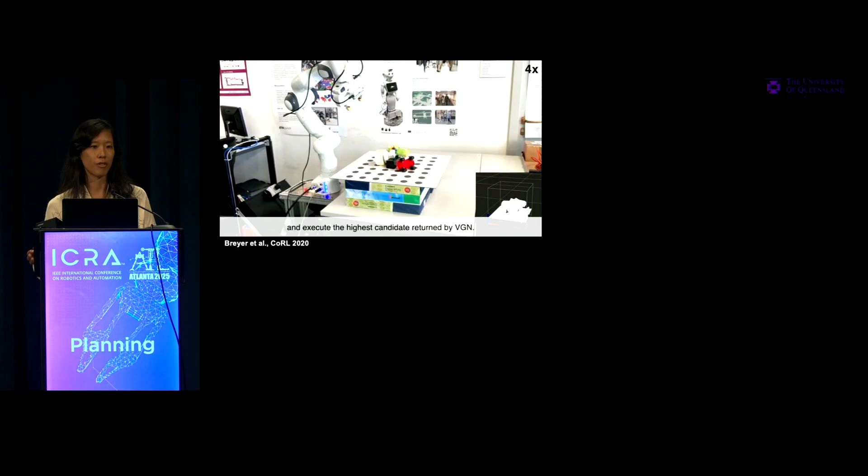So what kinds of physical interactions do our robots do well right now? I'd argue that they're pretty good at grasping at the moment. We really know very well how to get a geometric representation from 3D cameras, for example, which we can then use to plan grasp actions.

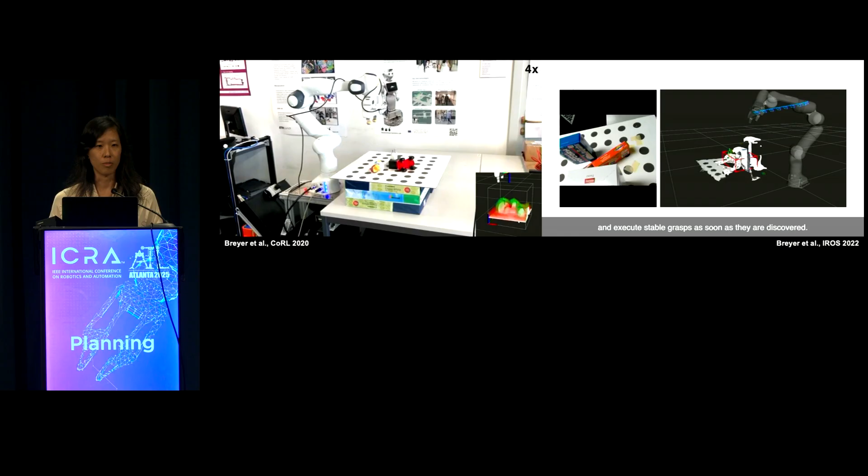We also know how to make the sensing part of this task more efficient through methods like active perception, where we only need to look at parts of the scene that matter to solving our task. So if we want to grasp a particular object, we don't need a perfect reconstruction of the full scene. We really only need to be looking at certain parts of the environment.

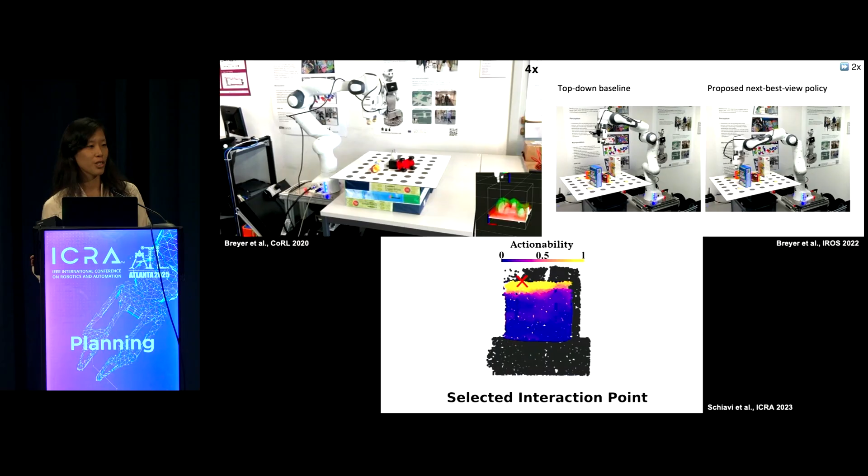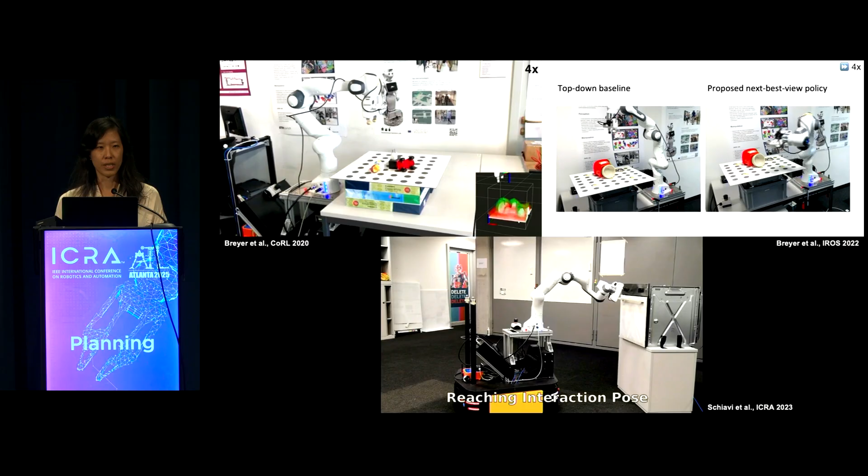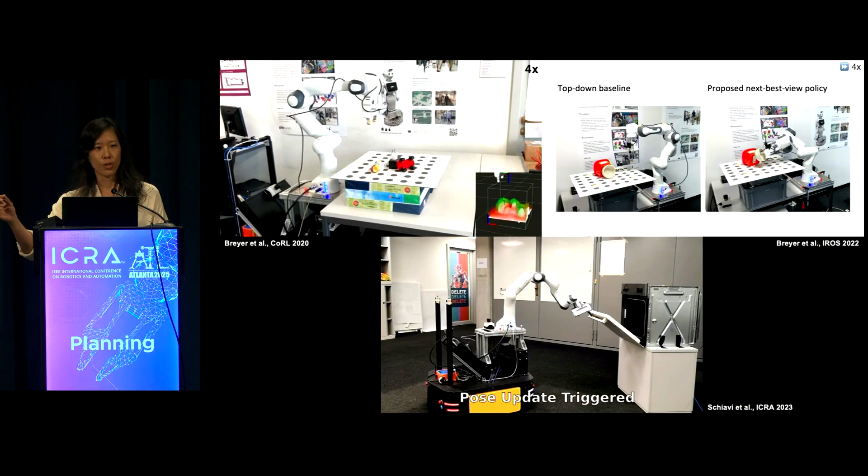We're also seeing robots conducting more complex force-based interactions over time, and Hannah showed some really excellent examples in her presentation as well. A lot of these tasks begin by observing the scene, deciding on a point of contact, and then executing that particular trajectory that you've planned. The basic paradigm across all of these examples is that the robot is meant to look first, plan, and then execute that contact and hopefully solve the task.

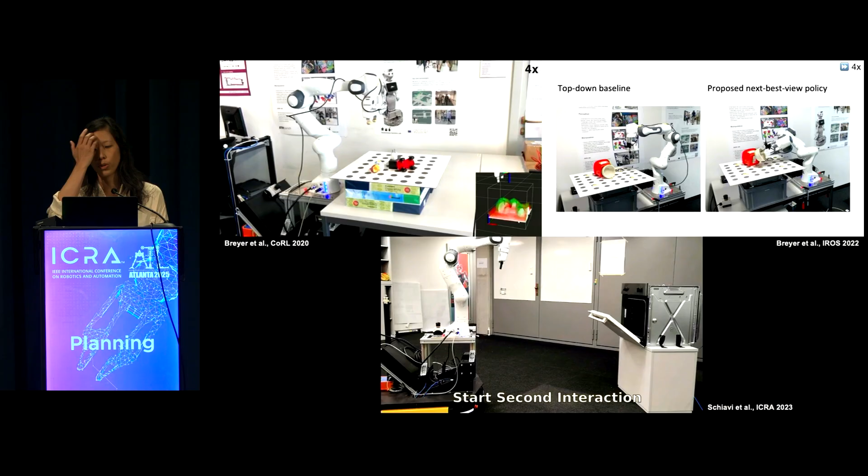And if you don't solve the task, then you repeat those three actions. So there are some general limitations here. The first one, I think, is that we don't properly close the loop. We don't consider how that contact, how that interaction can be used, first of all, to support perception. And we also don't typically consider interactions beyond the robot and that one object that it's touching.

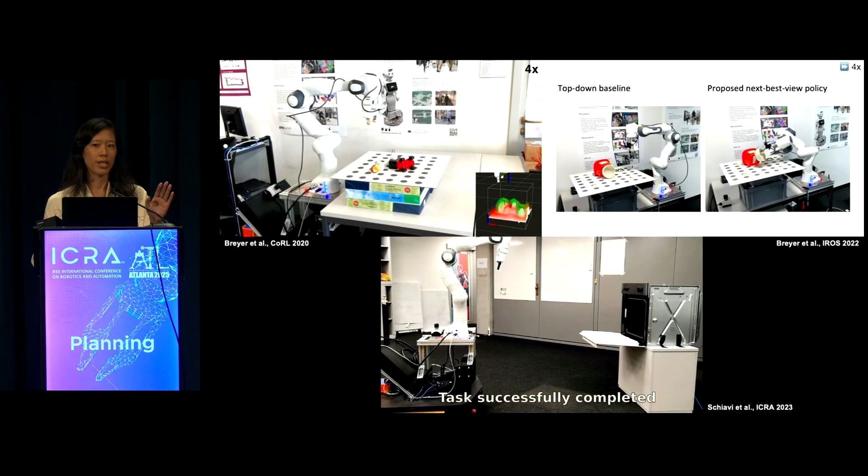I want to give you three examples where I think performing decision-making in this way really prevents us from finding good solutions. The first one that I want to show you is work by my student, Tom Pitcher, and it's in cases where visual perception alone is not enough to solve a problem.

So is it game over? Well, no, we've just established that our robots are pretty good at grasping. So in this sense, we should get our robots to physically interact with the environment, pick up the cup and actually have a look at what's underneath it.

Physical interaction in this case can more efficiently reveal hidden parts of the scene. It doesn't just have to be in cases where the object is completely enveloped by something else, but it can help us improve and make our perception more efficient. It also can make solving the task actually possible, making objects more accessible. So the question remains: how do we actually incorporate this option of physical interaction into our planning?

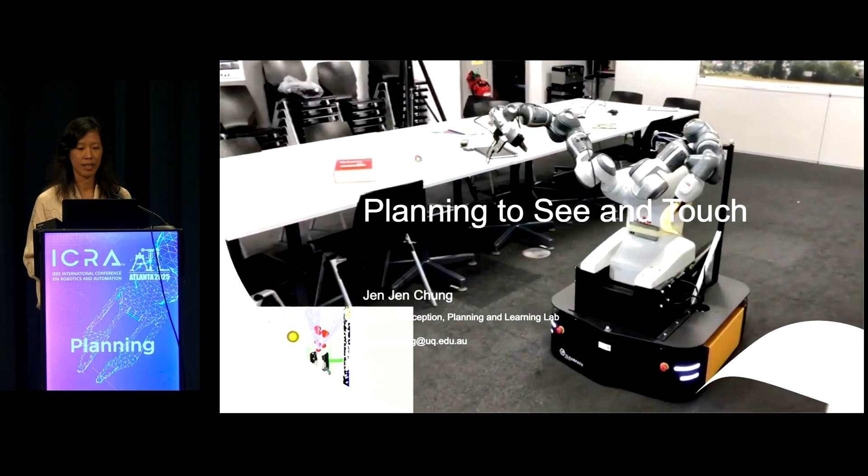Yeah, hi. I was wondering, your problem with the cups seems to me like a really good problem for reinforcement learning. And you've solved the problem of fitting the cup. Have you looked at optimal fitting, or the maximum number of cups I can fit, those sort of problems? Yeah, actually, it's a very challenging problem to solve for optimality, because you'd think it's a geometric problem, right, you should be able to solve for this. But it branches very quickly in terms of what you can do. So potentially reinforcement learning is the right way to go, because often the goal isn't to pack optimally, it's just to get everything in there at all.

In some of the previous keynote sessions, we've also looked at user preferences as being part of that optimality question. But I think in this case, what I wanted to emphasize was that when you're looking at contact and interaction and planning over those, these kinds of chains of interactions are really a blind spot in terms of how we understand and how we allow our robots to interact with the world.

Oh, hi. Sorry, I don't know if you covered this and I didn't understand it, but I was wondering if you consider certain types of interactions as unsafe, or if certain objects can't be touched.

Yeah, again, very good point. The last piece of work that I showed you in terms of that shared load manipulation, safety is a huge part of what we are concerned with in the solution. We need robustness, we need to make sure our system is passive so that we're not injecting more energy into the system indefinitely. So the way that we solve for it there is that we have it as a critical part of our objective function that we're optimizing over, and we also use tools like energy tanks to guarantee passivity.